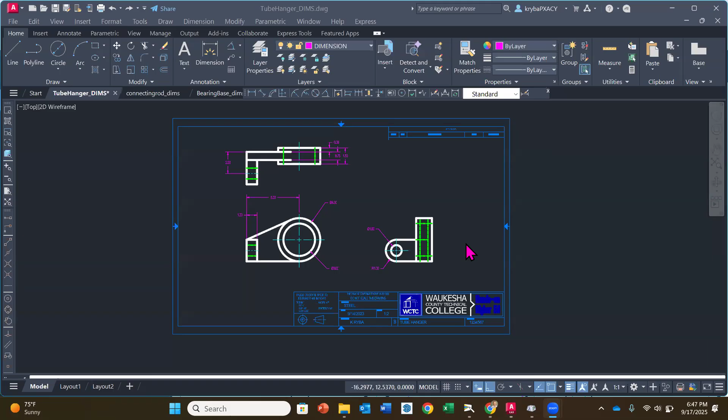Okay, so now we're going to go through the drawing guides and just make sure we have a good handle on what's expected for you to do.

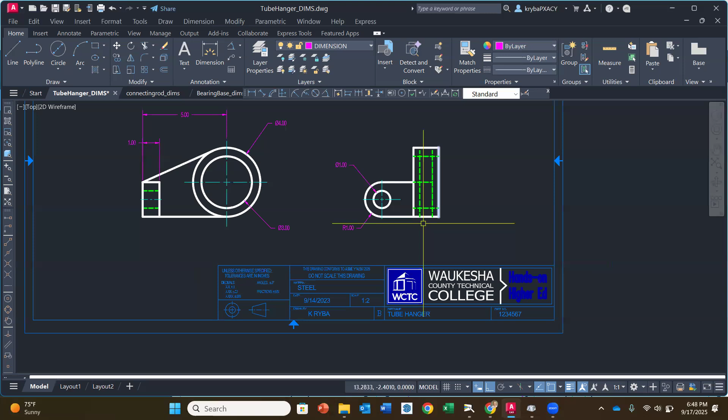So the first one I'm looking at here is actually from assignment 5A, the tube hanger. You already created the 3 views in module 3, so you want to go back to module 3. What you're going to do is open up, in this case, an inch template, and insert the 3 views you see here at a 1-to-1 scale.

Then you're going to pull in a B-size border. I checked them, and it's going to be 2 times, so that's a 1-to-2 scale. That means you're pulling in the border 2 times as large.

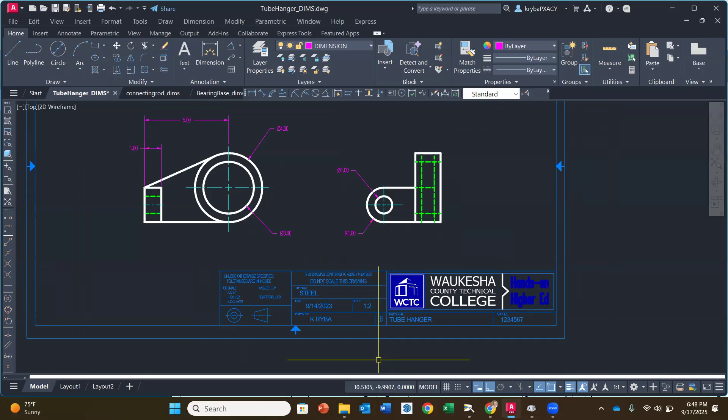When you do that and place it around, make sure that you're spacing out the views. You might have drawn them closer together, which is fine, but now you want to space them out so you have room in between to do the dimensioning.

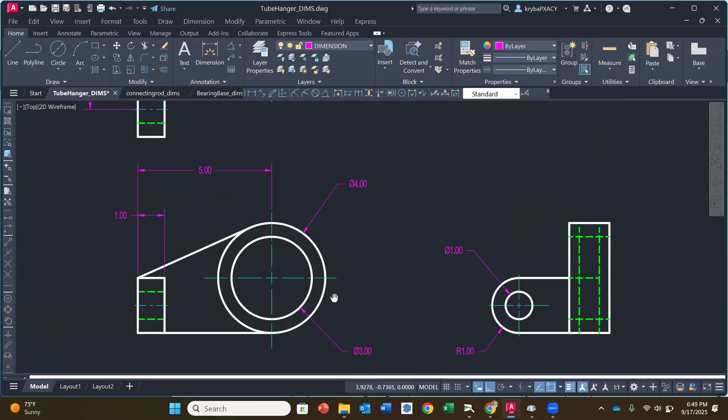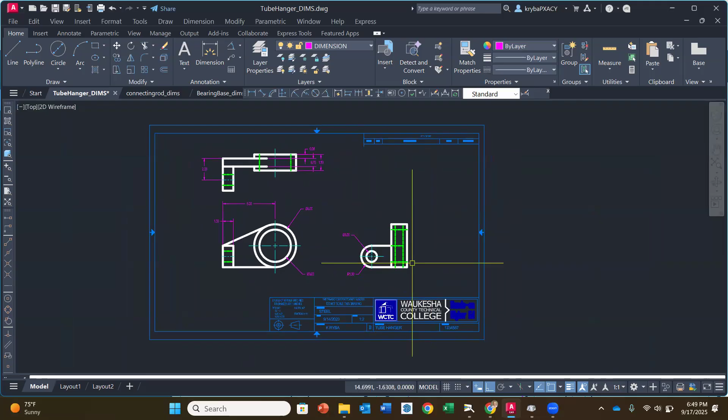Now, as we look here, I don't think there's anything on this particular drawing dimension-wise that's different than what we've already done. Make sure you're following along with me because I'm pointing out important things so that when you're handing things in, you have the information you need. All right, so that's the tube hanger. I don't think there's anything earth-shattering on that one.

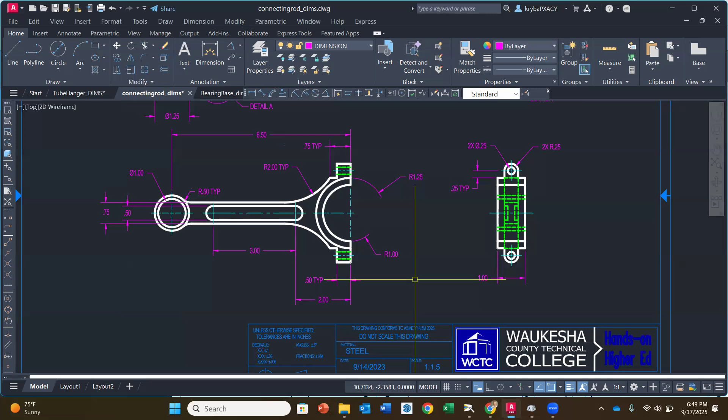Let's look next at the connecting rod. As we look at the dimensions, this is another one you already did. You're going to pull up your template blank, and this is going to be an inch template. You'll insert from block libraries your connecting rod at a 1 scale, and then you're going to pull this border in at 1.5 times, so not 2, but 1.5.

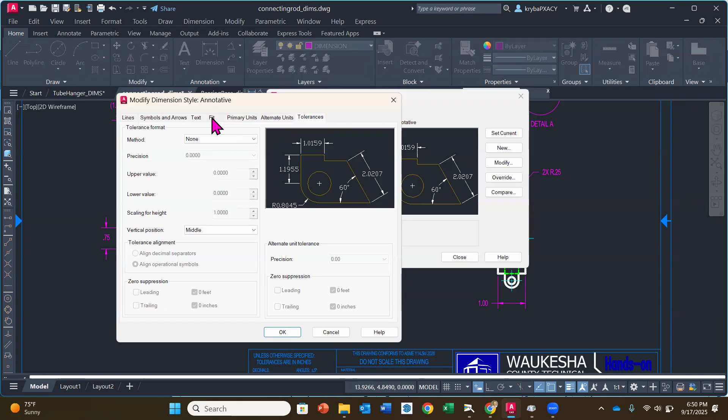That means when you pull it in at a different scale, you're going to go to the appropriate dimension style, go to modify, and go to the fit tab. Down here, you're going to see you'll turn on this overall scale, which needs to match whatever scale you pulled your border in at.

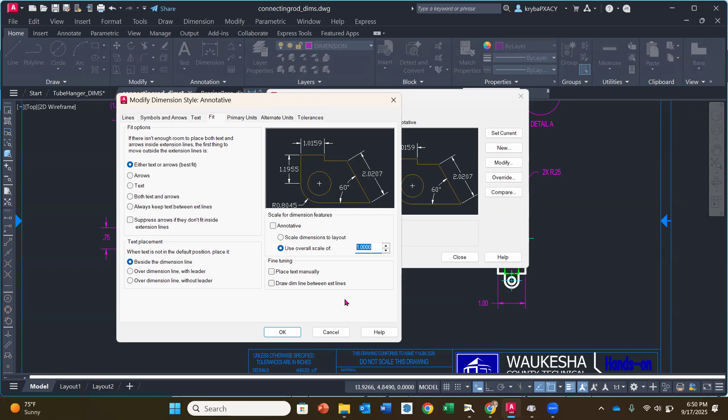So for this one, it's going to be 1.5. For the other one, it's going to be 2. But if it's 1, then you don't have to change it. Does that make sense? So when you look at your dimensions and the size of the text, you always want to compare it.

It's not that it's exactly the same as the title block, because I think the title block text is just a little bit larger, just so it's easier to see. But you'll notice it's about the same size. If it's half the size or double the size or something, then you know you have to go to that fit tab in the dimension manager and fix that up.

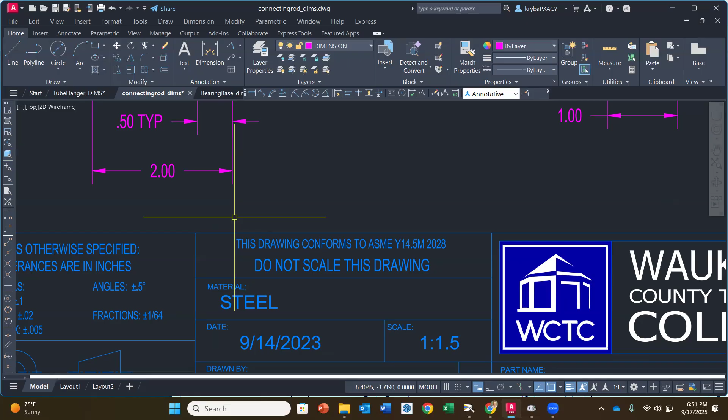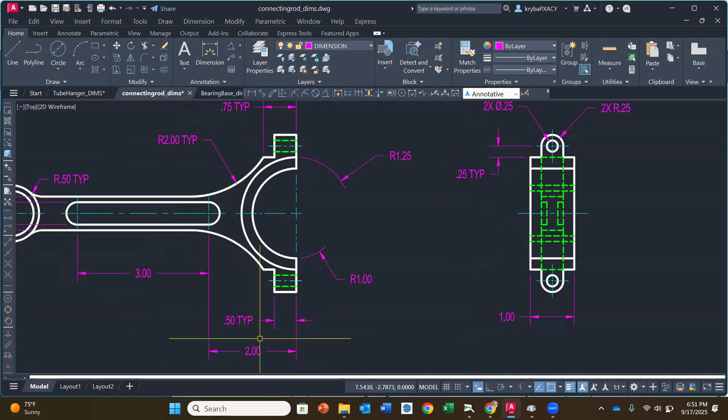So that's that. You'll notice we have 'typical,' or TYP. All that means is there are 2 places where this dimension is shown, and rather than showing it in both places to crowd the drawing up, it's going to be typical. Notice here on the other side, it would be the same dimension, so you'll see that in a couple spots. When you put the dimension in at 0.5, you double click on it, go to the end of that dimension, and type space TYP.

That's it. So make sure you add those. Make sure when you dimension as a radius, it'll automatically put the R in front, so the radius dimension is going to be up here.

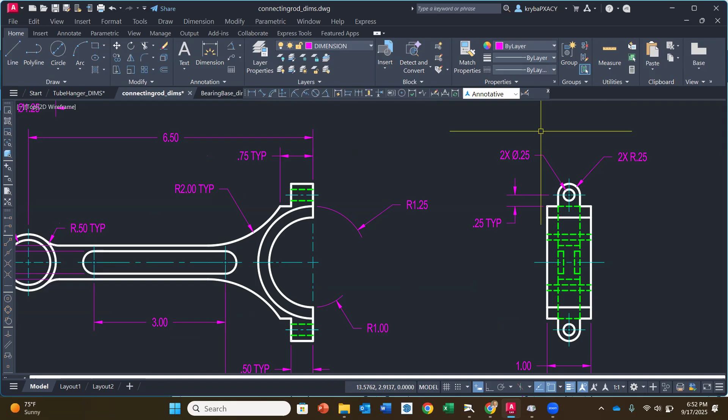Same thing with diameters, you'll have the diameter, but here we need 2 of them. So you're going to double click, and in the front put '2 by' space before the diameter symbol. Make sure you make that space because we want to see it's '2 by,' not 'by 2,' and not a lowercase x. Every single piece of text on a drawing is in uppercase, no exceptions. Make sure you abide by those rules.

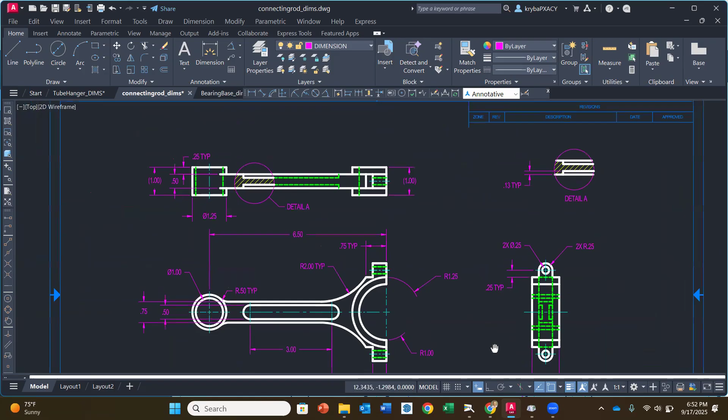So those I think are pretty straightforward. You'll notice over here you have a 1-inch dimension with parentheses around it. All that is a reference dimension. That reference dimension is there because it is identified in our right side view, the 1-inch dimension here. So on either side, in this view, it's kind of, if you would, 2 views away.

If you're wondering what size is that, I thought it would be good experience to put it in as reference. You have to put the parentheses around, otherwise somebody might interpret it as a regular dimension, and the regular dimension can only be found once. So if you repeat for clarity anywhere else, you have to put parentheses around it as a reference.

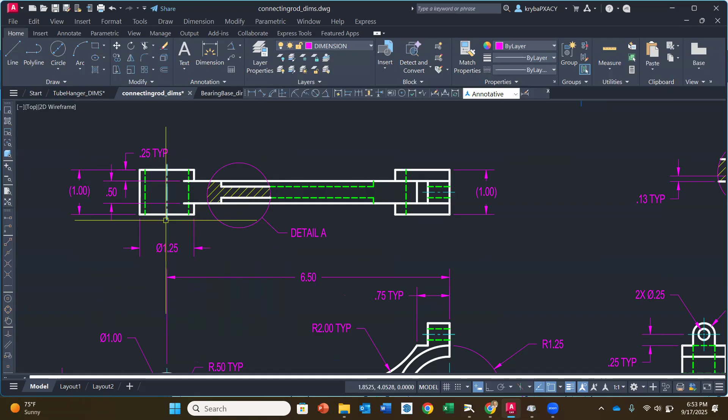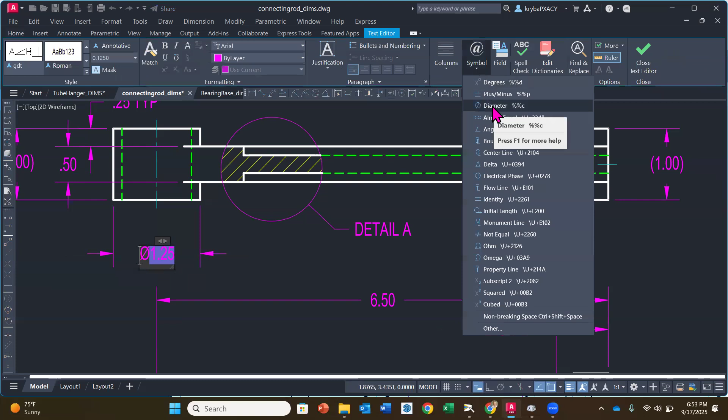Now, this one right here is going to go in as a linear dimension, but we're showing it as the outside diameter of a tube in its rectangular view, which by standard is the preferred method. Here it's going to be, again, a double click. Then right before, you're going to go to symbols, and right on top here is diameter. You'll click on that and it'll automatically go in place. You don't really have to do much else, okay? So that's how you get at that one.

Now, the detail. This was a little different, okay? If you recall from our tech drafting, you can add these details so that you can get more information. As we know, we cannot dimension to hidden lines. So what do we do? What we can do is make a little breakout section, as they call it here. So I have a circle around. Notice that the circle is on the dimension layer, okay? And then there's simply a line going to it, and it's called detail A. That detail will be over here for you to dimension.

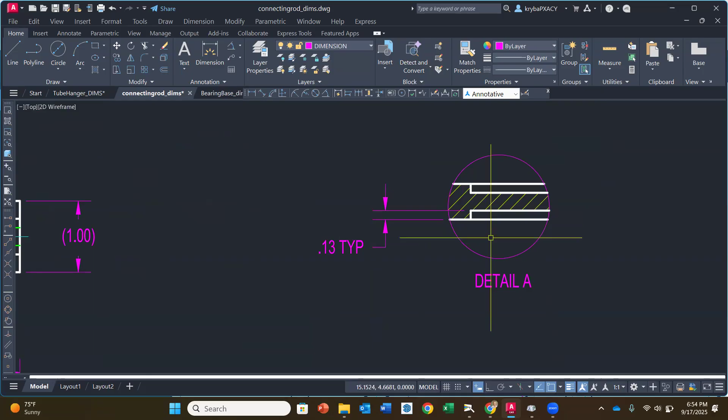What we want to get at is the depth of that recess on the front and the back, and we can't get at it in this view because it would be dimensioning to a hidden line. So notice what we did here. We broke it out. We wanted to go deeper, and the area within the confines of this circle is now going to be lines that are visible. And in between, it's a section line where you would cut through material to get at those visible lines.

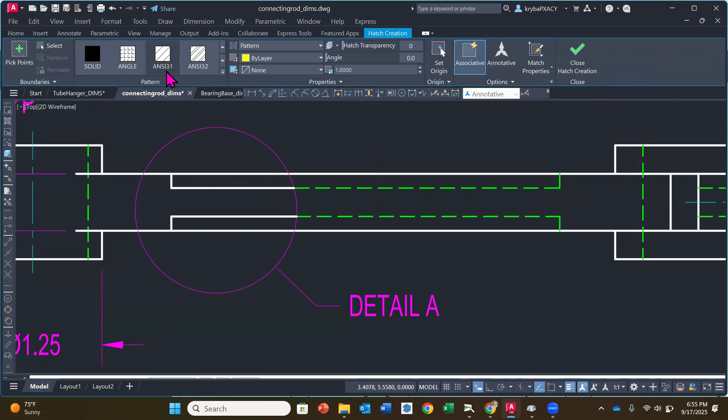So all this is, if I delete this out of here, once I have my lines as object lines inside the circle only, and this circle is a random size, I didn't put it to any particular size, just enough area to get enough information. All I'm going to do is go to the crosshatch. As we know, the crosshatch is right here in the draw command. I'm going to click on that. Make sure that you have ANSI 31. And then we're just going to click in this area, and that's going to be your hatching.

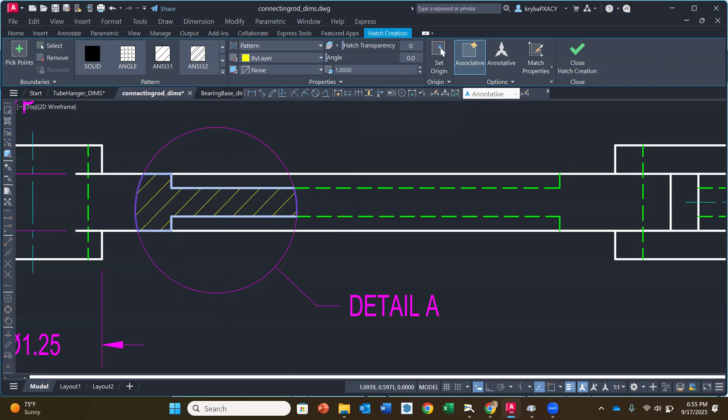If you need to change the scale of it, if you want it closer together or further apart, you can change that. 0.5 to 1 seems to be appropriate. So that's good, we'll just put it back to 1. And then all you do is copy this over here and add the dimension. That's it. So now we can get at everything as a visible line, as opposed to not being able to because it's hidden. So that is the connecting rod. That's the only special thing there, but I think you can make that leap.

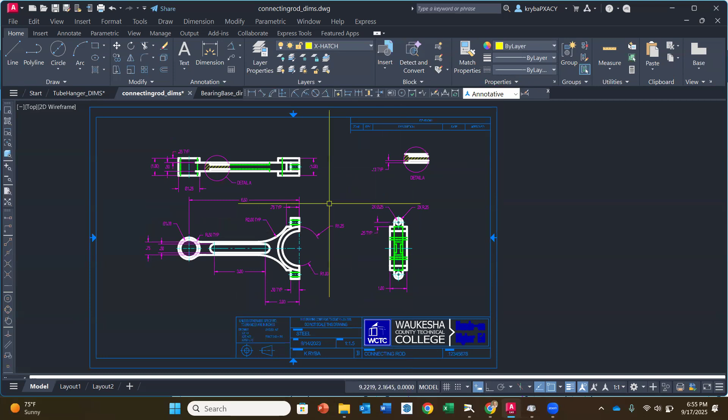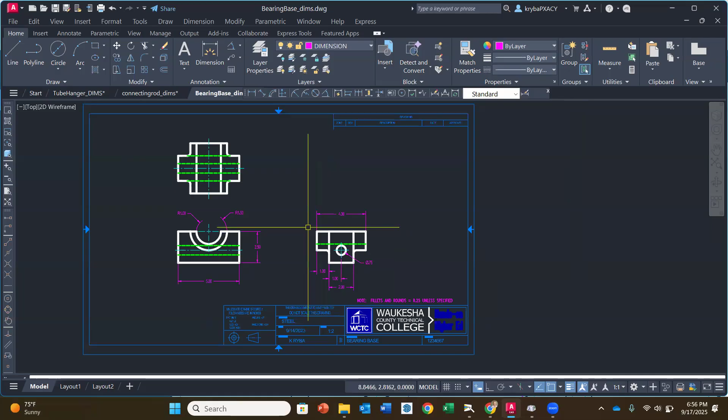The next one we have is the bearing base. You'll notice here, I think all the dimensions look pretty normal. Nothing out of the ordinary here. Again, when you pull those views in, don't forget to explode those views so that you can push them apart to take up space on what here is a B-size border.

There is a note down here. To put this note in, you're going to go to the Annotate tab, and over on the left-hand side, there's multi-text. Just click on that, multi-text again, and it's saying create an annotative object. You can just say okay here, and you're going to create a box. So I left click, and now you can put your note in there. Blah, blah, blah.

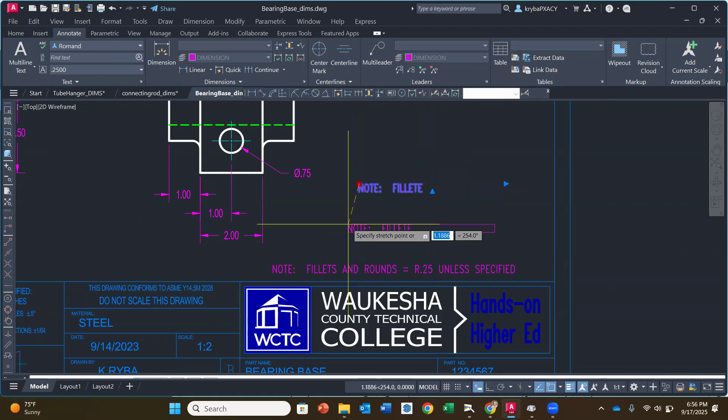Do I want to save? Sure. And once you have that in place, you can click on it and move it wherever you want it to go. So that's adding a note. That might be something a little bit different, but make sure you put that note on there. Then you don't have to dimension each one of the individual fillets. You're giving it a dimension in that note.

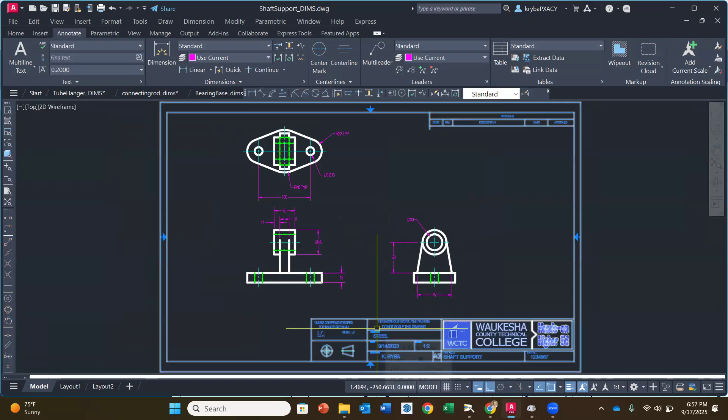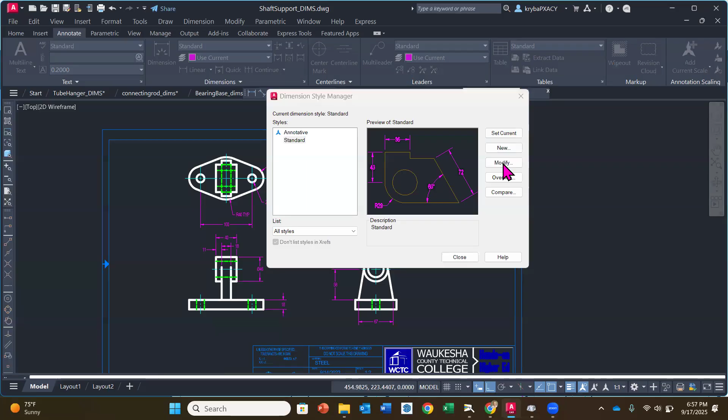The last one from assignment 5A is the shaft support. This one is our metric drawing. For this one, you're going to be pulling in, in quotes, a B-size metric drawing, which is an A3. You're going to bring it in at 2 times the scale. That means you're going to go to your dimension style manager, modifying, going to fit, and changing this to 2.

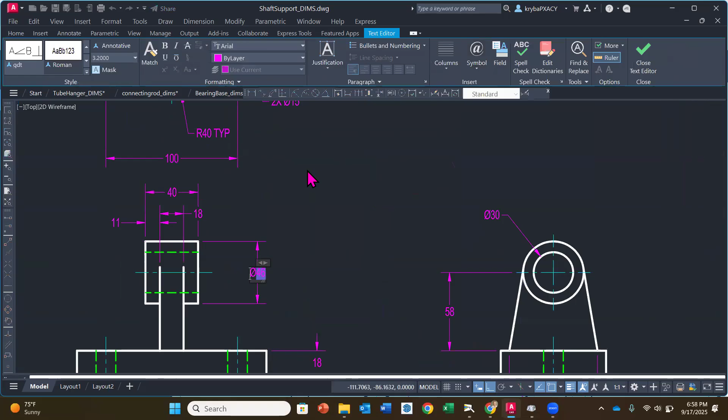Changing that to 2. Now, as we look around, I think everything on here should be, again, pretty doable. You'll have to add the symbol here for the diameter of 46, but you do that by double clicking, getting into that editing mode, and you'll go to symbols and diameters right here, okay? Adding typical is just double clicking, space after the 0, and then TYP. 2X, don't forget, not X2, it's 2X, the number first, then the X, capital, and then space between. And otherwise, everything else here I think is okay.

One other thing on here that you might run into, because this is a metric drawing, the line type scale might be super small because it's millimeters. When you put in line type scale, I'm going to do that right now, LTSCALE, okay? You're going to notice, if you can see my screen, it's at 25.4. Does that sound familiar? The number 25.4. That's how many millimeters are in an inch. So when AutoCAD sets up their spacing for their line styles, it's based on an inch increment. So all you have to do is factor that up.

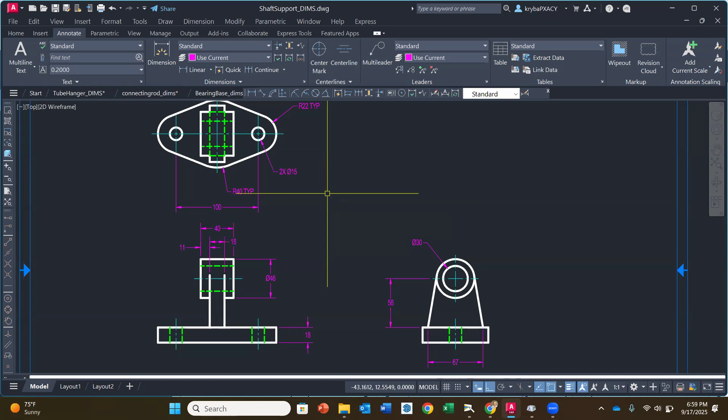So when you start showing hidden lines, you're going to be like, they look solid, or the center lines look solid. What you're going to do is put in a scale 25.4 times, okay? The LTSCALE. And then that way they'll show for you and you'll start seeing them, because they're really tiny based on how the line type was set up. Okay. So I wanted to call that to your attention.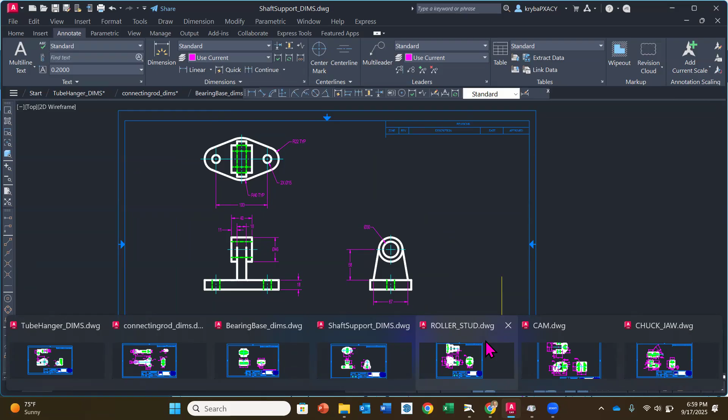So those are the 4 drawings that you have to do in assignment 5A. Okay. So again, you've done all the views already. You're pulling them in, adding a border, dimensioning, and you're on your way. The last 3 that you're going to do are going to be the last 3 in assignment 5B. We did one already. We did the index feed top to bottom as part of our lecture this evening. So that one you have done. Obviously, if you have to go back in and fix that up or finish it up, you can. Here, you're going to notice this is the roller stud. So for 5B, all of these drawings, you have to start from scratch, okay?

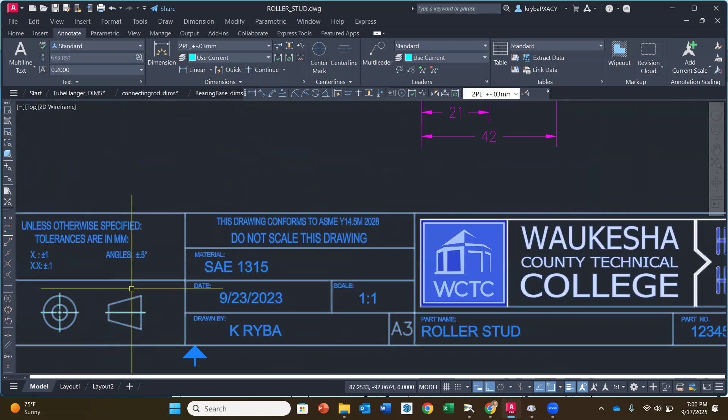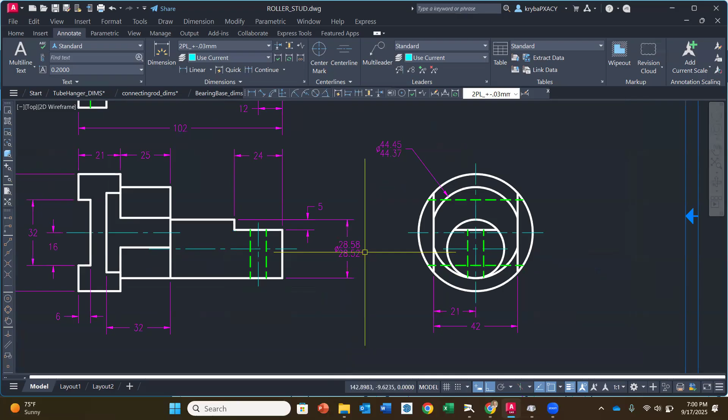So if we look here at the drawing guide, this is a millimeter drawing. All the tolerances and dimensions are in millimeters. This is an A3, so it's the B size of the metric borders, okay? So A3 is what you're pulling in. It's 1-to-1 scale. And then the only thing you're really going to notice here as far as dimensioning is that you have to do the limits here. So you have to remember when you draw this, what was the size that you made it to? Because that's going to dictate how high and low those values are going to be. So there's 1, 2, 3 of those. And then the rest are normal dimensions. So there's that one.

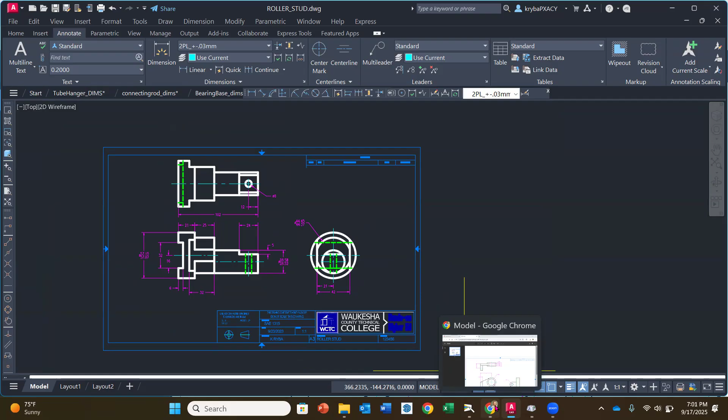The views for these you're going to find are in the tech drafting book. So 5A assignment is out of the AutoCAD book. 5B assignment is out of the big tech drafting book. All right. That's the roller. Here's the cam. This is another one that you're going to be doing. Don't worry about the center line. I have that in there. You don't have to put the center line in there unless you want to explore how to do it. Go ahead and see. There is a center line symbol, I believe. So you can put that in.

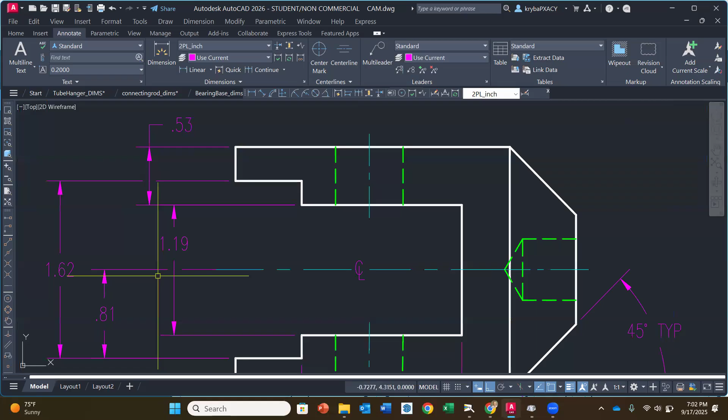Notice here a couple of things. I had to put the gap in here because I can't have an extension line crossing a dimension line. So you have to move your dimension over, and then add a line to ensure that there's a gap between the part and that you're not intersecting over the top of a dimension line. You can intersect extension lines. An extension line on a dimension is this line right here, the horizontal line. The dimension line is the one that has the arrowhead with the numbers. Those cannot be intersected.

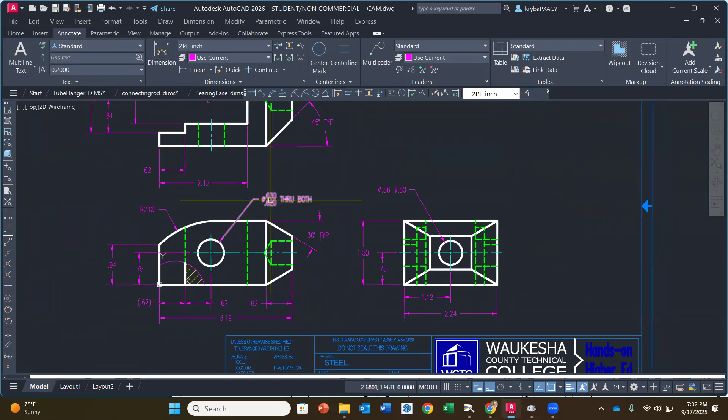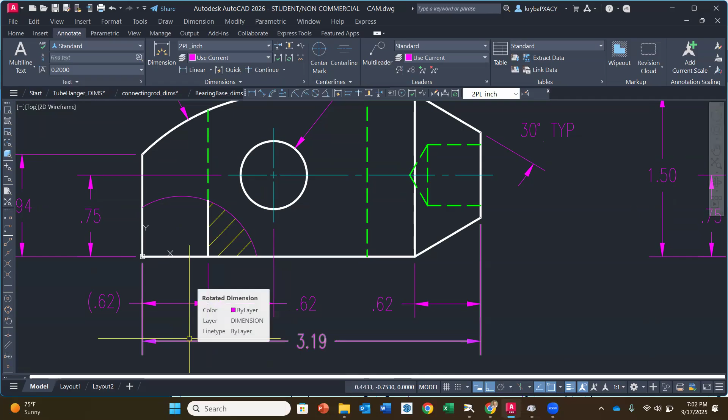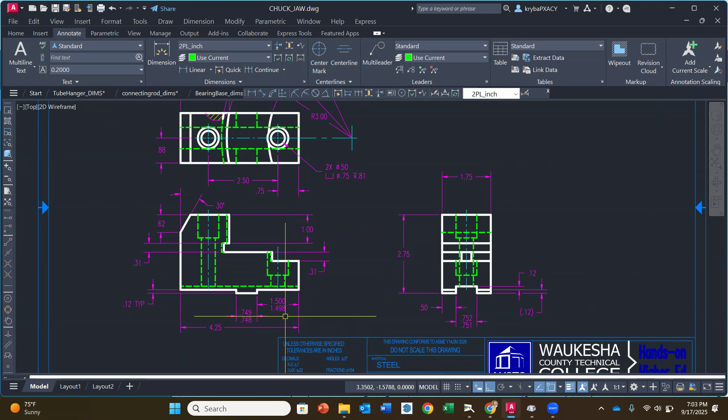So duplicating that. And then the last drawing that you have is the chuck jaw, okay? The chuck jaw is here. Here you have a couple limit dimensions, so watch those. On here, there are both 2-place and 3-place decimals. You have a counterbore callout, okay, for those 2 counterbores. You're going to notice you have a little breakout section here, okay, to grab the end of that radius. And then getting the dimension in for these radiuses, okay?

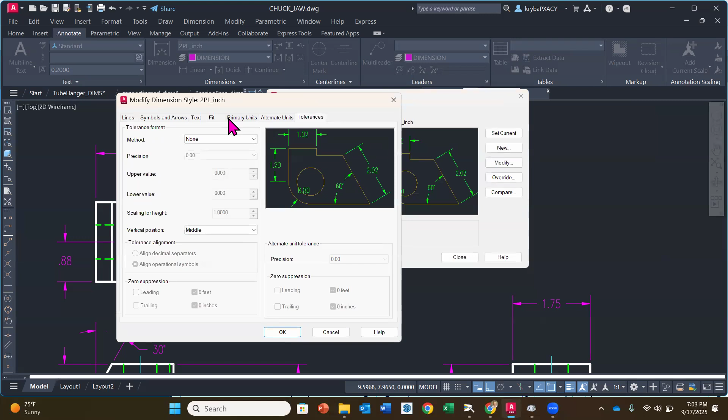To get the dimension in for these radiuses, I'm going to click on it. You're going to go into the dimension style manager, okay? And we're going to go to modify. And we're going to go to the fit tab, okay? You'll notice that you have to click on arrows and you need to click in beside the dimension line, okay? Watch this dimension right here. If I go over dimension line, it's going to do the outside. That's what it normally will do. I believe that's what it's set at when it's just a standard setup.

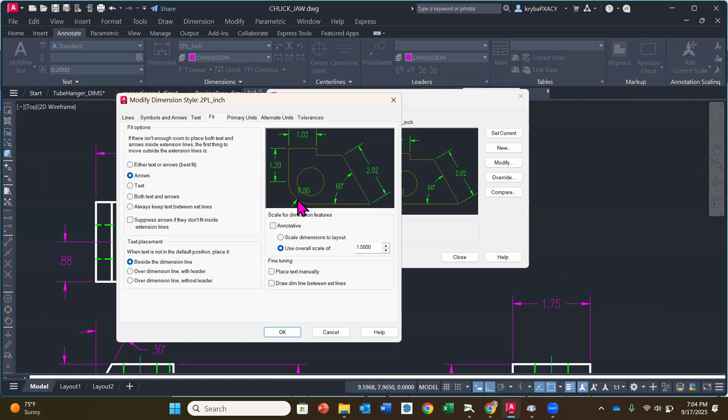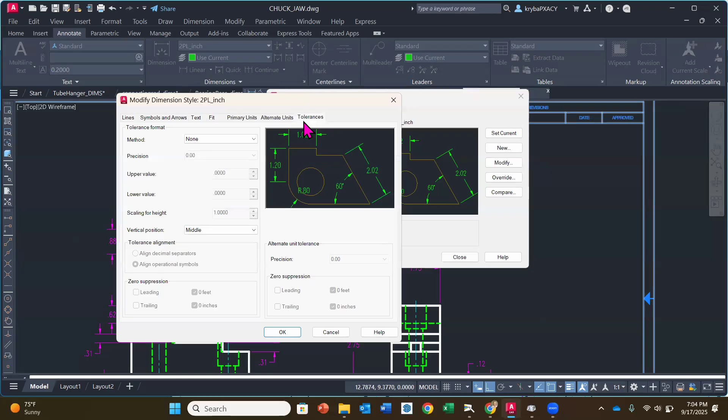You need to check beside the dimension. Otherwise, you're going to get them all pointing, okay? And where we need them to be, I'm just going to cancel out of here. We need to see that they all share the same center. Do you see that? Okay, so this radius, and that radius. So just wanted to point that out. So again, you're going to go into the dimension style, modify the fit tab, and you want to go arrows and beside the dimension line. Okay, so that's where that is.

All right. And I believe that's the last drawing that I just wanted to kind of go over and point some of those little things out that you might come upon that we hadn't encountered, but now you know. As we look at these, are there any questions on anything? You probably will have questions as you start looking. Oh, I see there's something in the chat. Can you go over the detail view again?

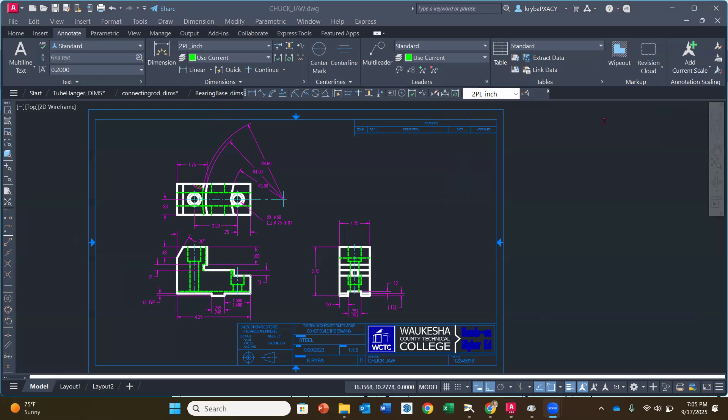Okay. So that is going to be back over on this one, the connecting rod. So here we have the connecting rod. You'll notice here that we're going to use the dimension layer to just create a random size circle, just large enough to kind of get that end in there. And then you're going to make the lines that would have been hidden just inside of that circle object lines, or visible lines. And then the area in between here is going to be a crosshatch.

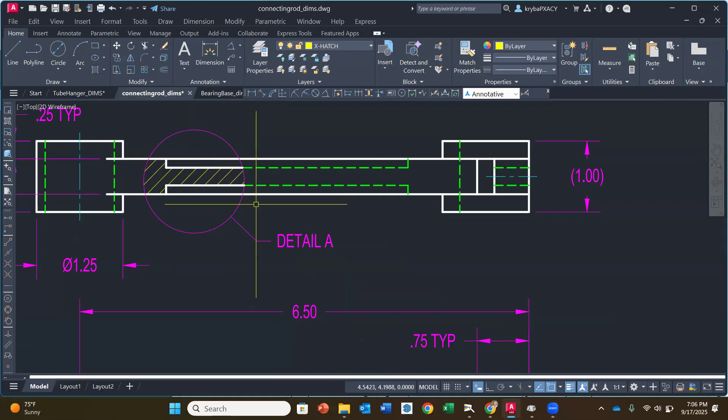So back on the home menu, you would then make sure you're on your crosshatch layer. And then you would simply click in that area with the crosshatch feature, and that's going to add your crosshatch. Do you need more than that, Dominic? And then you'll copy this over. So this is just a copy, and this is where you would dimension it then off of the part. It kind of breaks it out, and then you want to make sure that you just show detail A. Is that what you're looking for?

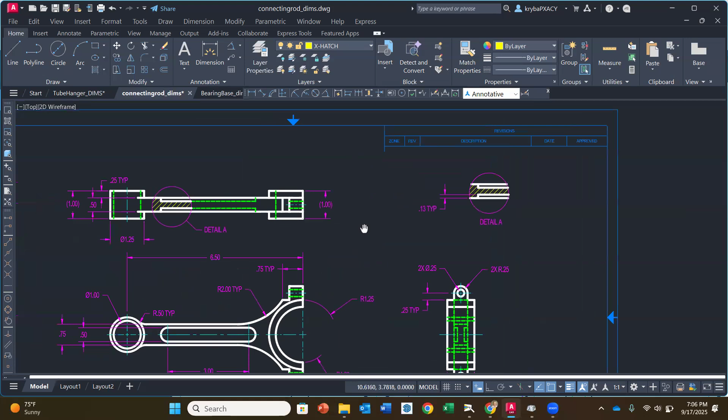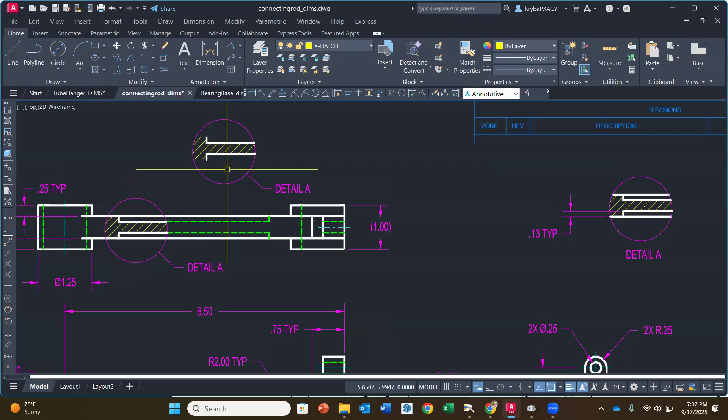How would you specify to copy that? Oh, because you would have these all separate lines now, you're just going to go copy, and I can even grab all of this, okay? And then enter. I'm just going to move it up here. And then the only thing I have to do is add the outside line, because that was a continuous line through. So I'm going to go back to my object line, do a line, and start from here and go all the way.

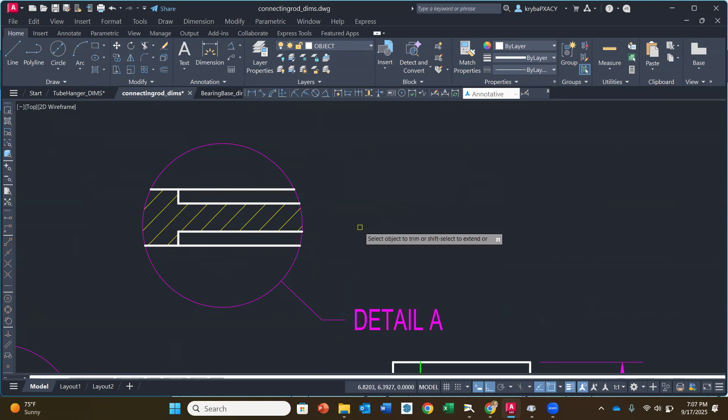Wait, I'm going to have to go ortho. There we go. Yes, I'm going to have to go past it and then trim, and then the same thing over here. So I'll grab it, get it in line, and then past it and then trim. And then you would put the detail A underneath here, and then you would dimension it as you see. Is that helpful? Got it now. Okay. Good.